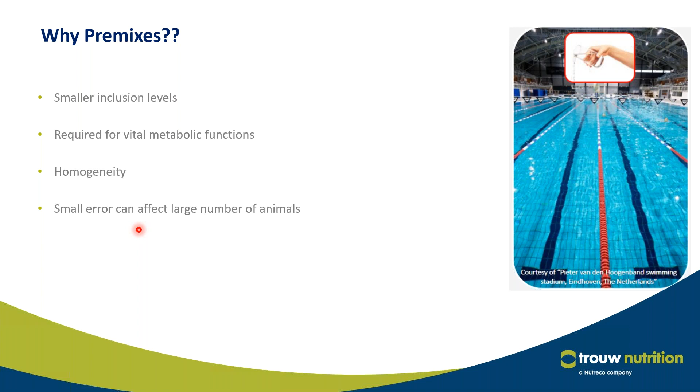Okay, so there are various steps involved while we are producing our premix at our factory. The major ones being understanding or knowledge, quality standard - this is our internal one known as nutrace that I'll be explaining in the further slide - and then formulation and mixing.

So what do we mean by understanding or knowledge? It's having a basic understanding with respect to the nutritional requirement of the micro ingredients of various species, like broiler, layer, breeder, dairy, aqua, etc. So their requirements are different, and we basically need to know what their requirements are. And then according to the nutrients they require, we should have knowledge of the forms of the micro ingredients that need to be added, which type, how bioavailable they are, what are their interactions, how do they act with each other, their stability, etc.

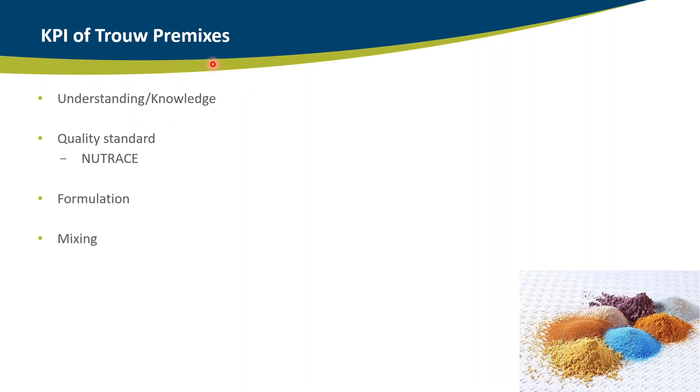Once we have a basic understanding, next comes the heart of the premix production, that is the quality standard. We have our own internal quality standard on top of the ISO, the GMP, FAMI-QS, etc. This is built in to ensure that consistency is maintained throughout the production process, right from the raw material to the finished premix. That's where nutrace helps us a lot.

And also, whilst we are doing this, we also need to keep in mind that it's the producer who is important and not the supplier. Why do we say this? Because we have strict quality control and quality assurance methods for us to ensure that we produce a quality product.

So the same pattern can be seen in other industries. For example, Apple company - everyone has an iPhone or Apple Watch or some other Apple product - and they have very strict global QC measures. That is the reason most of the spare parts of these products are procured from China, a bit from Taiwan, Japan, etc., assembled in China and then distributed to sales. So it's actually how strong your QC measures are that determines the quality of the product being produced, and the suppliers are not that important.

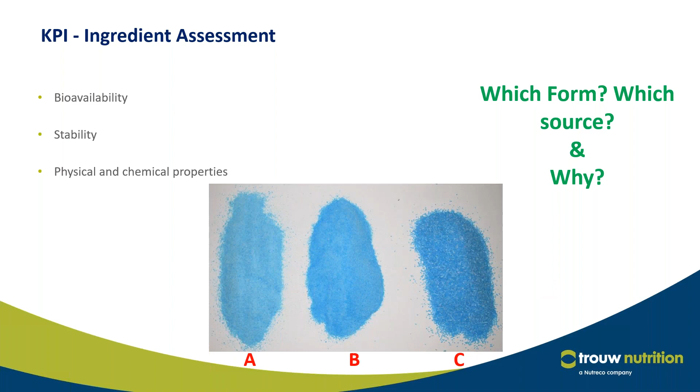Thank you all for your vote, and these are the results we have. For A, 7%, B, 29%, C, 29%, and 'can be any of these', 36%.

Over to you, Dr. Sabiha. Thanks, Chandni, and thanks everyone for taking up this poll. The answer is obviously option D, it can be any of these. Why? Because even though they have varying characteristics. For example, C is a bit wet and coarser in nature, making handling difficult. A is too fine, so it can stick together or flow a lot, which we call flushing. B has an optimum particle size, so it seems to be better. But any of these forms can be used if you know how to handle these different characteristics of the same raw material.

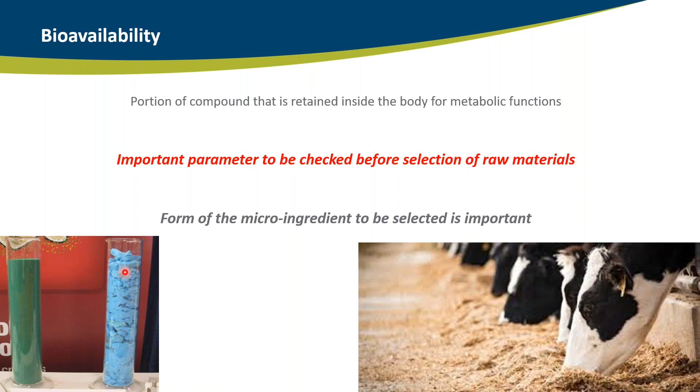Then comes the next parameter, stability. There are a lot of micro ingredients that have stability issues, the famous ones being vitamins, which are highly susceptible and sensitive to various external stressors. These can be in the form of moisture, light, pressure, heat, chemicals, pH, other supplements like trace minerals, and other oxidizing and reducing agents. So while we include vitamins, we need to ensure we add sufficient, suitable carriers and processing aids so as to produce a stable and quality premix.

Talking of stability, a stable raw material should be one that is not highly reactive, has good powder properties, and has less hygroscopicity. When such raw materials are included in a premix, the end premix will tend to be a stable one. So we wanted to check the stability of a premix, and we took two premixes, subjected them to a temperature of 40 degrees Celsius at a relative humidity of 85% over a period of 24 hours. Out of the two premixes, one tended to remain the same even after 24 hours, meaning it had quality raw materials going into it and sufficient amount of carriers, etc.

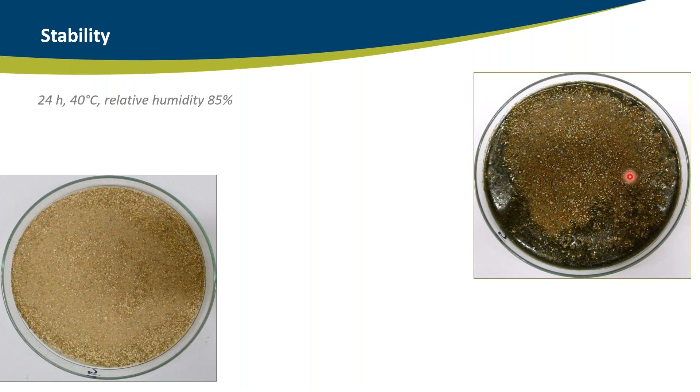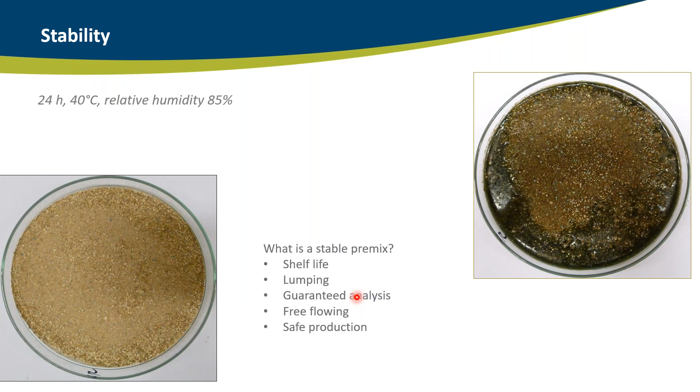The other one went into discoloration and was hygroscopic. This might be because it had raw materials that were hygroscopic enough and were not handled in a proper way so as to produce a stable premix. So stability is very important—a stable premix should have guaranteed analysis throughout its shelf life, should be free flowing without any lumps, and should be produced in a very safe manner.

Next comes the physical and chemical properties of the premix. Each and every ingredient has particular physical properties, like particle size, shape, density, flowability, etc. These are equally important as the chemical characteristics because they define how the premix looks, what type of premix we offer, and the handling of raw materials, their possible interactions, and mixability.

It starts with the visual approach. By looking at the raw material, we should be able to take a primitive decision with respect to the acceptance or rejection of the raw material.

So this is not the form recommended to be used in the animal nutrition industry. With color itself, you can reject this source of ferrous.

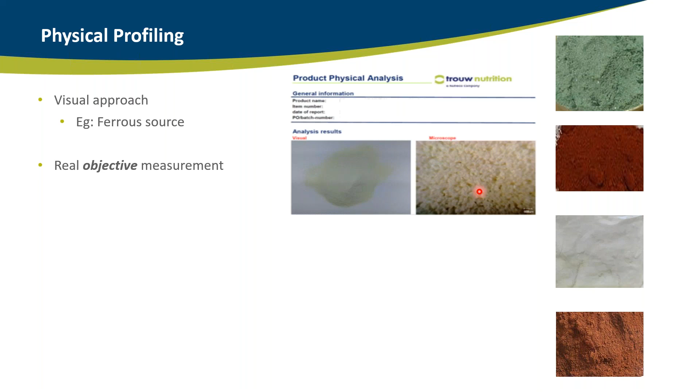By looking at the raw materials, you should be able to take a decision with respect to its inclusion or not. The measurements that we make are very objective. For example, you see here a raw material, this is how it looks to the naked eye, but we also look at it under the microscope, which gives an indication of how the particles are and how they are distributed.

That is where physical profiling comes into play, and various parameters are measured. The first one is particle size distribution. Particles tend to be either fine or coarse, depending on how they are produced. Fine is good for mixability, but it can reduce flowability. It has high electrostatic charges and tends to be very dusty.

The coarse, on the other hand, is bigger in particle size, but is very good in flowability, reduces dust, and is less reactive. So we really take a decision with respect to whether we are going to use the coarse form or the fine form for the raw materials included in the premix.

And then, of course, the famous density - both bulk and tap density - are very important to measure, to understand the packaging details as well as flowability and mixability of the premix, because it forms the base to give an indication of how compressible or cohesive a premix is.

That's very important, because the premix is produced at a facility and then goes to the customer's place. They should have premixes which are not too cohesive, so that it easily flows in their systems when automated or manual handling is used. They should not be cohesive enough to stick to the scoops when being used in feed production.

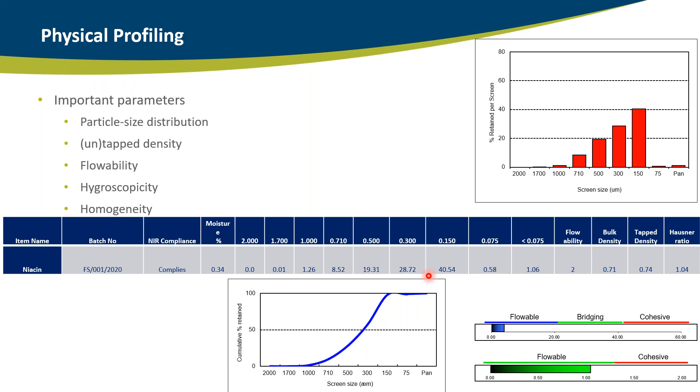For example, if you see here, this is how we carry out the physical profiling of the raw material. This is niacin, so it has a very good flowability of 2. It has good bulk and tap density, so it's not a compressible or cohesive raw material. Most of the raw material falls in the particle size of 150 to 300 microns. This gives us an idea with respect to the type of carrier to be included in the premix, and the type of coarse or fine raw materials to be included.

So the flowability meter, we measure it through flowability cups of varying diameter, the one at the top with the highest diameter and the one at the end with the lowest diameter. We measure a specific amount of raw material and allow it to flow through the cups. So 1 and 2 are the best ones in terms of flowability and thereby the handling, and anything 5 and 6 are not desirable, and we reject those raw materials.

So that was with respect to the physical characteristics. Then comes the most important one, the chemical characteristics. They play a role with respect to achieving the nutrient claims as per the requirement of the customer.

So we use NIR technology here, and we use it to map to a large extent all the incoming raw materials, and to some extent for end products we use the fingerprinting technology, and we also assess the activity and potency through that. The undesirable contaminants, such as heavy metals and dioxins, are also measured majorly for the minerals and the carriers. And of course, the pH is estimated for the vitamins because they're highly sensitive to pH. We also measure the pH of the carriers so that we use the right carrier for those vitamin mixes. And of course, the coefficient of variation studies.

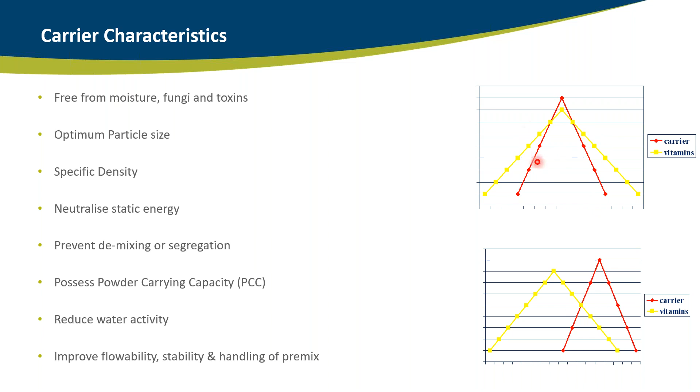So you can see here the two types of carriers. The first one complies with the characteristics of the vitamins, the other one doesn't, so the one on top is the most desirable carrier to be used. Within carriers we have different types: the inorganic carrier, also known as a diluent, and the organic carrier, simply known as a carrier itself.

The inorganic carrier is generally cheap comparatively. It has a very good density, and both low as well as high powder carrying capacity depending upon the particle size that we use. The disadvantage is that it has a very high pH.

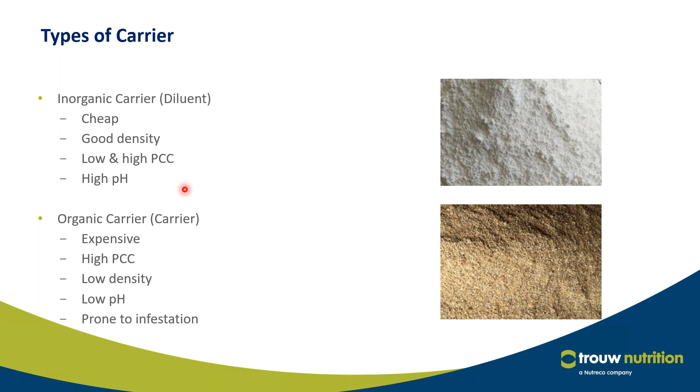But coming to the organic carrier, it is comparatively expensive. It has high powder carrying capacity, so it allows raw materials to flow very easily when included. The disadvantage is it has low density, and anything with low density can cause segregation or demixing. It has low pH, which is an advantage, but also the limitation that it can be prone to infestation if not handled properly. So it's always advisable to use a mix of inorganic and organic carrier in specific ratios.

And then come the processing aids. These are used to improve the stability and flowability of the premix. Vitamins are a mix of fat and water soluble vitamins, with the fat soluble being easily susceptible to oxidation, which is why antioxidants need to be added to prevent their oxidation. And then, of course, the free flowing agents are added to improve the flow characteristics of the fine particles.

So for example, we talked about this earlier as well: when particles are too fine, they tend to stick to each other and reduce the flowability of the particle. But when those particles are coated with free flowing agents, or particles with high powder carrying capacity, they are separated and kept apart from each other, and this leads to improved flowability.

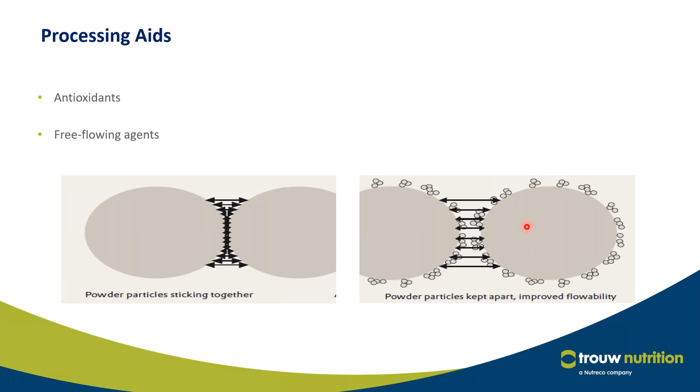Then comes the most important one, the formulation. We have a whole idea of understanding, and then we procure the raw materials according to our knowledge, and then comes the formulation. The formulator works to put in raw materials so that the nutritional claim is met.

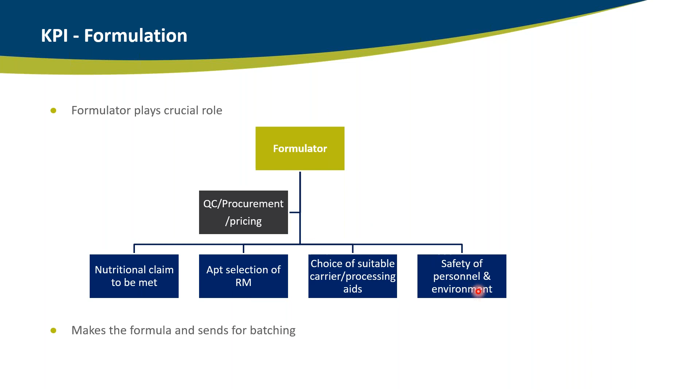He aptly selects the raw materials. He also chooses the carrier and processing aids according to the powder properties of the raw material, keeping in mind the safety of the personnel and the environment. So he makes the formula and sends it for batching.

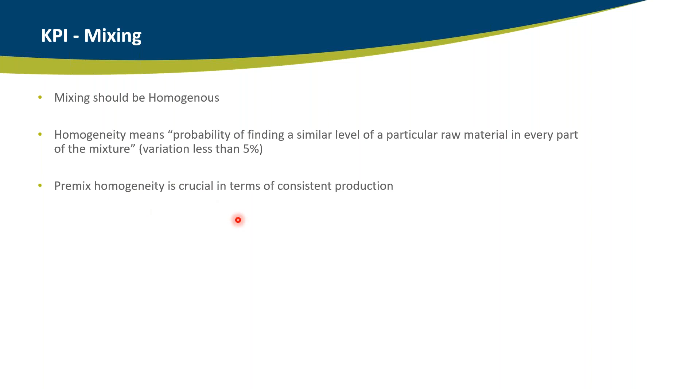Next comes the mixing. The produced mix should be homogeneous, meaning the same ratio of the added ingredient should be present in every part of the premix, with variation less than 5%. The one we produce here has a variation less than 3%, which Sandeep will be talking about. Premix homogeneity is very crucial for consistent production.

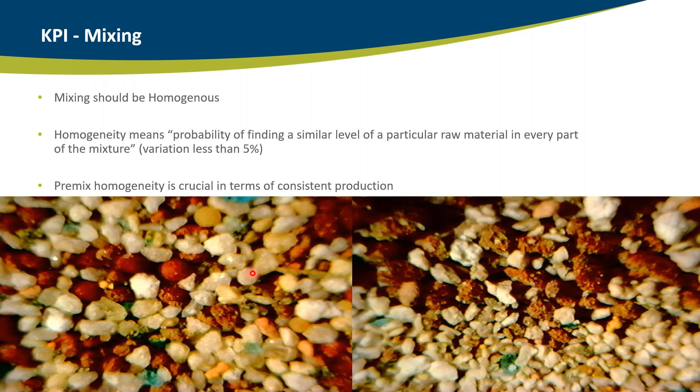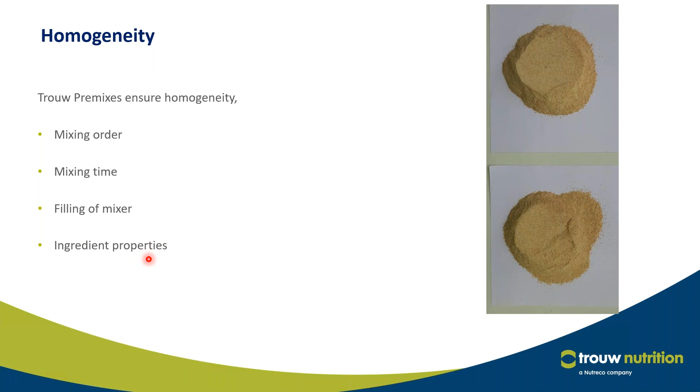This is just an example of how two different premixes can look. Obviously this is not a homogeneous one, while this one is more homogeneous, having equal amounts of white and brown particles. At Trouw, we ensure homogeneity because we have knowledge of the mixing order, which goes first, which next, and the mixing time established through coefficient of variation studies. The filling of the mixer should be neither underfilled nor overfilled, which can lead to non-uniformity issues, and we have a large amount of knowledge on the properties of the ingredients.

That was for the raw materials and how the premix is produced. After the premix is produced, it undergoes a QC check. For the finished premix, we follow the same 5 pillars to ensure quality premix is produced. We also carry out physical profiling for all batches. Chemical profiling is done once a year at random for specific premixes, or as per the need from the industry.

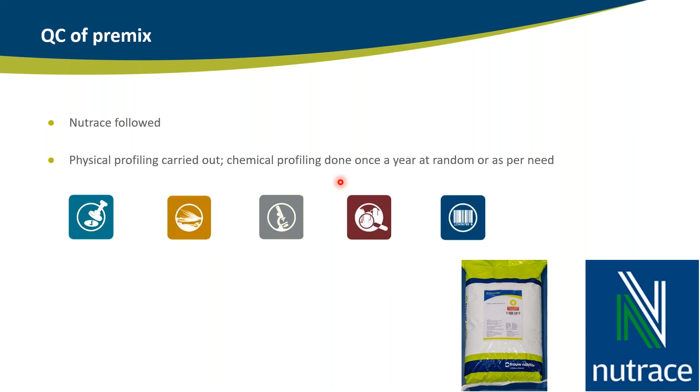Just have a look at these premix pictures. There will be a poll following this, asking which one is best to be used.

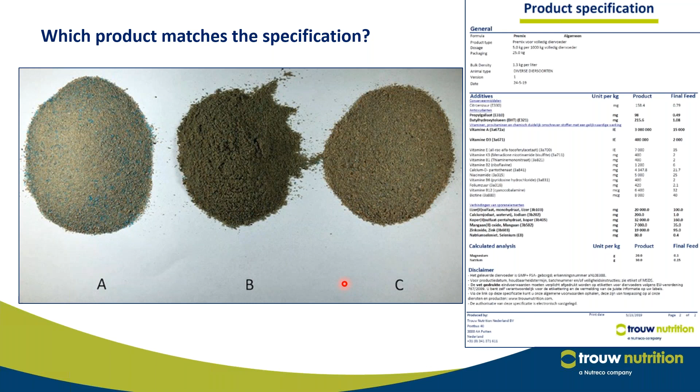So what do we offer in Trouw as a part of the premixes? We offer vitamin premixes as a standalone, mineral premixes as a standalone, and we also offer a composite premix known as MaxCare, which has a combination of the feed supplements and the required feed additives.

So why do we want to have a composite premix? Talking of the challenges, many of us are aware of this. It's in terms of quality and quantity basically. Quality in terms of the quality of the micro ingredients that are being procured, how they are stored. A bit of a headache is actually the inventory management. And then the quantity of the micro ingredients that are procured, because generally they're procured in smaller quantities, so pricing management becomes a very big challenge.

These are actually very known challenges to the customer. To some extent, these challenges are known or unknown, we can say. The major raw materials like maize, soya, MBM, etc. are procured. Few have labs to analyze, few are dependent on external labs, and few do not have labs at all. So we really don't know if precision nutrition is being followed with respect to the nutrients that are being delivered to the bird, and if they are formulated in the right way.

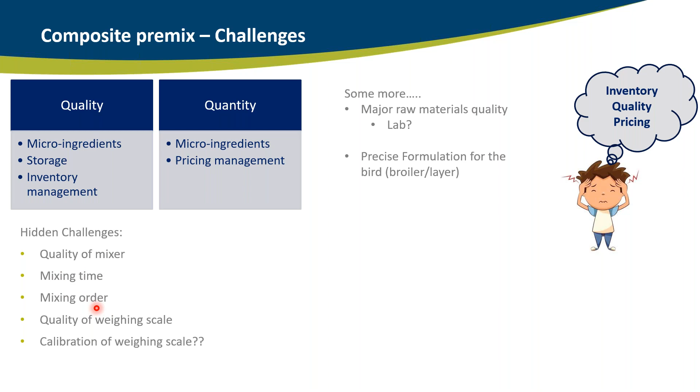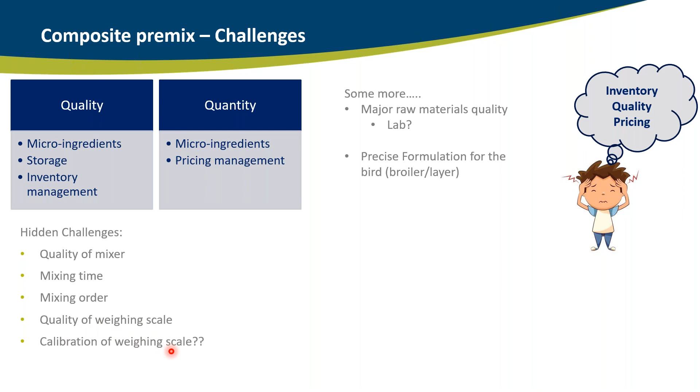So to some extent this becomes a small question mark. And then there are a lot of hidden challenges with respect to the type of mixer being used to produce this composite premix, or very popularly known as base mix in the industry, and the mixing time being used, what is the mixing order that is being followed, and while we are weighing these raw materials, the micro ingredients, how are they weighed, what is the quality of the weighing scale, and whether this weighing scale is calibrated on a regular basis. Do we measure the CV of the mix that is being produced? If no, then non-homogeneity is highly possible, and this non-homogeneity of the base mix or composite premix will lead to non-uniformity of the flock and inconsistent performance.

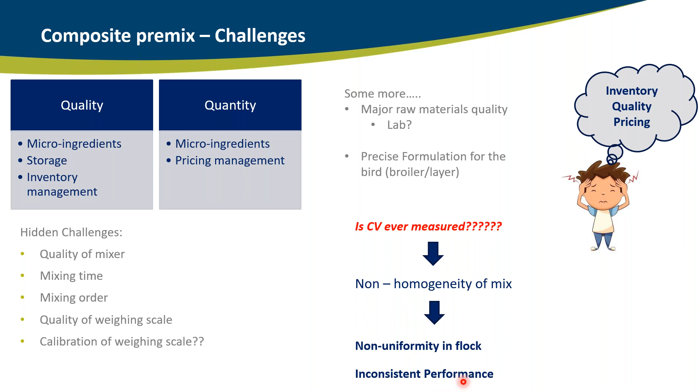So to address this, we saw there's a lot of headache involved there. MaxCare is a one-stop solution that will allow you to relax like you are near a very cool beach. So MaxCare has a balanced mix of vitamins, minerals, amino acids, and required feed additives. We have standard formula, and we also customize it depending upon the requirements of the customer.

The homogeneity of the micro ingredients is highly ensured here because we have expertise in micro ingredient handling, and they are always clubbed with precision nutrition offerings, so that the MaxCare formulation as well as the final feed formula being used meets the nutritional requirements of the animals. And it is optimized in feed cost. I would not say lesser feed cost or higher feed cost, it's optimized so that it gives a better performance and consistent animal performance. And the one to stress upon here is it's an antibiotic-free product, so we do not use antibiotics in our facility. Neither AGPs nor anticoccidials are used in our MaxCare.

So the benefits are in terms of convenience, that's the first and foremost one, because the customer need not maintain inventory of too many micro ingredients, and it's very easy dosing for him, no human errors come in. Just have to put 1 or 2 bags per ton of the mixer, and then it's a simple purchase, need to be in contact with just one supplier. Simple logistics, too many vehicles will not be coming into the feed mill or the farm, so only very few vehicles coming in. Assured quality because of our micro ingredient expertise, and of course assured performance in terms of better body weight, FCR, better uniformity, and better production characteristics in terms of the reproductive animals.

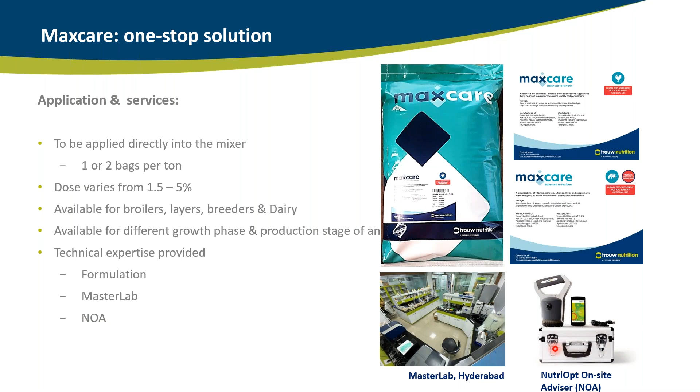So the key takeaways: premixing is an art, with a lot of science going into it. Its production should be carried out only by one who has expertise in it. It should be produced very carefully with great precision, because even small errors can cause huge losses in animal performance. The homogeneity and the flowability of the premix are crucial. The premix produced should be safe, reliable, stable, sustainable, as well as traceable. So the expertise actually lies in how we buy the best quality raw materials and the way we formulate it so that the best products will be produced according to the customer requirements.

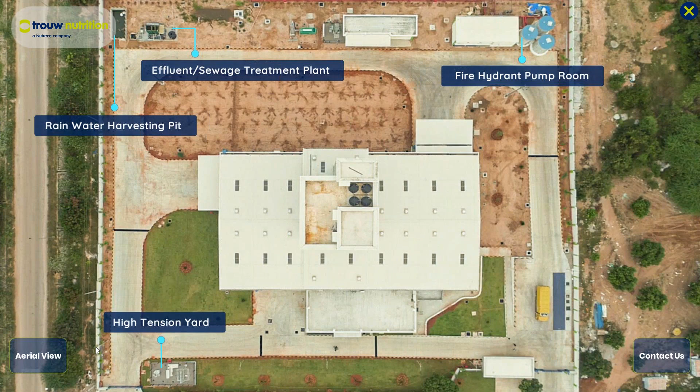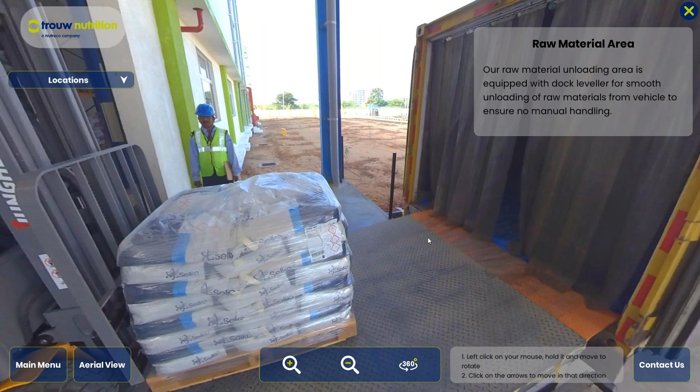We will take you forward to our raw material receipt area. Here we have the raw material unloading bay, wherein approved vehicles are docked with assistance from our security. We are equipped with a dock leveler, wherein the forklift enters the vehicle and unloads the lots we receive. This is arranged in an order so that there is minimal handling by man, which helps us maintain the integrity of the product as well as reduce man handling.

Once the raw material has been received, it is kept in the quarantine area and a sample is withdrawn, wherein it is subjected to quality control tests as per the monitoring program. Each individual raw material lot received is labeled with a barcode to comply with our requirement of tracking and tracing. So all the ingredients we receive in the factory are labeled with a unique barcode, which the system identifies during complete processing.

We'll move ahead to our warehouse. Here we have the complete picture of our storage areas, which are divided into two locations. One is the ambient temperature area, which does not have any subjective cooling facilities but is equipped with an active ventilation system, helping us keep the temperature at least 5 degrees below atmospheric temperature. For example, if the temperature at Jadcherla is 35 degrees Celsius, we will have around 30 degrees in the warehouse.

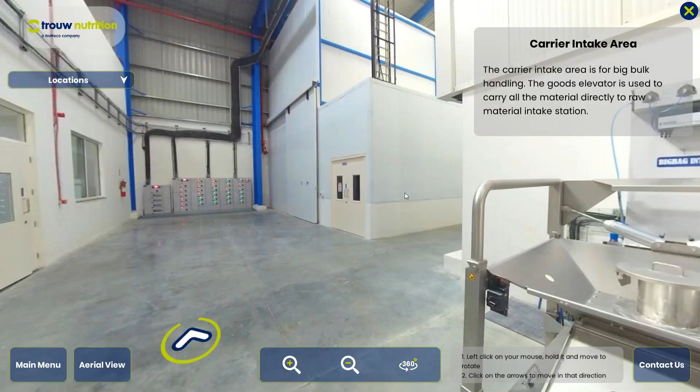Okay, now once we receive all the raw materials and they've been stored, these raw materials have been released by quality control after approving to the desired parameters. Once these raw materials have been approved, production requests the issuance and gets the ingredients for the daily production.

Here we can see our carrier intake station. It is a big bag handling station wherein we can handle bags up to 1 ton, and this system is equipped with a barcode system and an HMI, human machine interface, where you can see the description of the ingredient going inside. Once the operator scans the barcode, the system allows it to dump the ingredients into this intake station, where this ingredient is taken to our 8th floor, which is the storage area, where we'll be going now.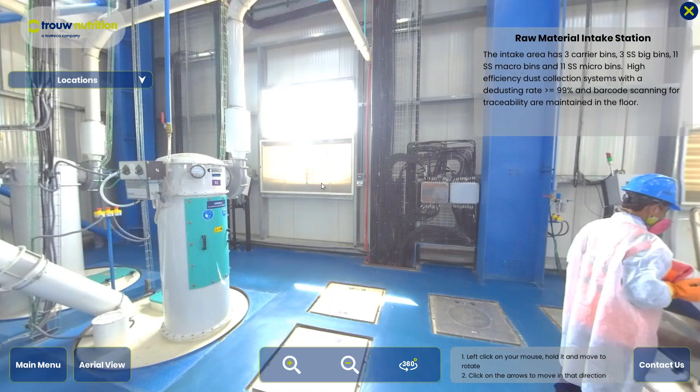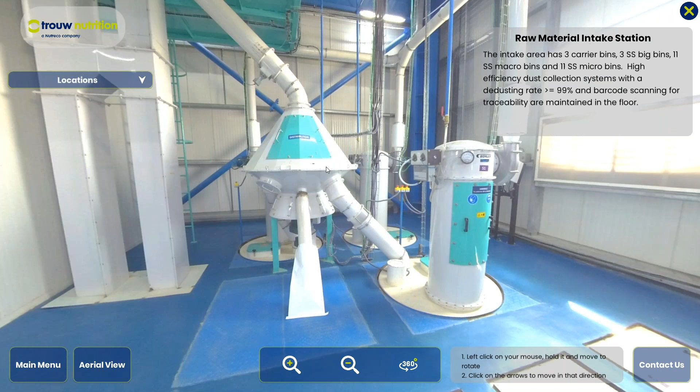So this storage area is part of the production area now. What we have here is the storage locations, which are our silos. This is the carrier storage area. What we have seen at the ground floor, the intake station brings the material here by means of conveying systems such as bucket elevator, and with the help of a distributor, it is automatically distributed to its dedicated storage areas or storage silos.

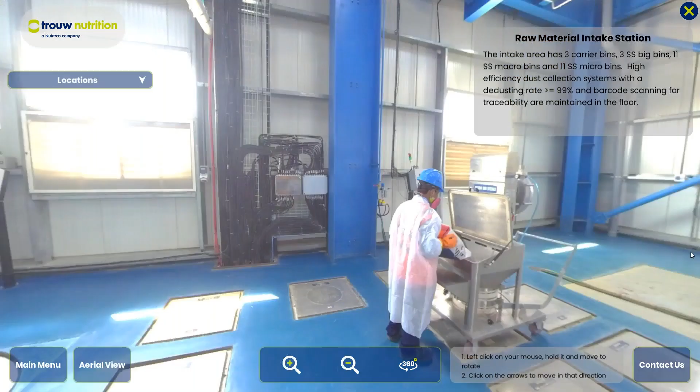What we have here is other ingredient intake stations such as vitamins and minerals. This has been constructed in a way that we handle the material only at the point of intake, and that is the minimal handling, the only handling done by a human at the intake stations. Once these bins are filled, the material is completely taken into the production process automatically. These systems are also equipped with HMI and barcode scanners, wherein the system operator scans the barcode and allows it to be taken into storage.

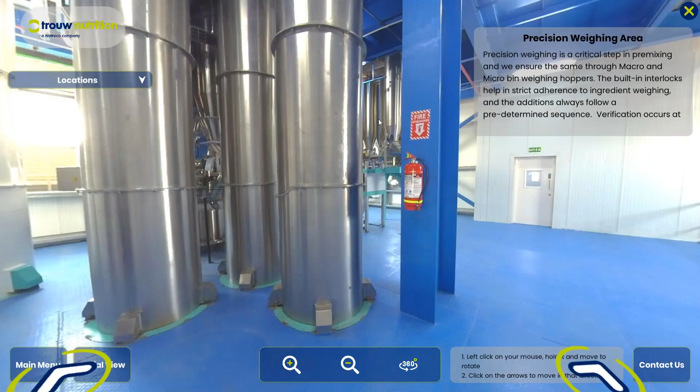What we can see next is our precision weighing area, wherein the active ingredients are precisely weighed and transferred through this conveyance system. The precision of our weighing system is up to 200 grams with a deviation of 0.2%, which allows us to basically negate any kind of deviation into the process.

As I'm talking, this process is completely automatic. There is no human intervention; it is only monitored by a person who is centrally controlling all this process.

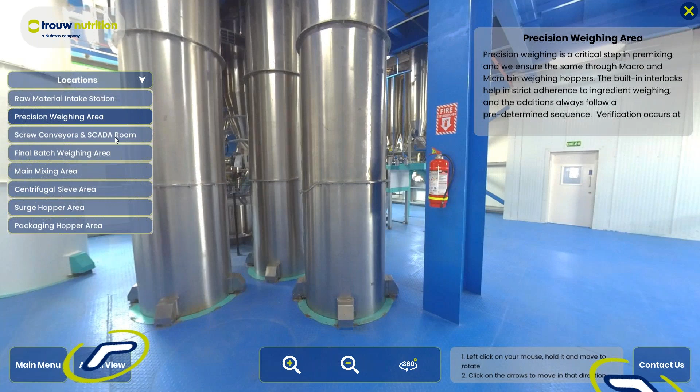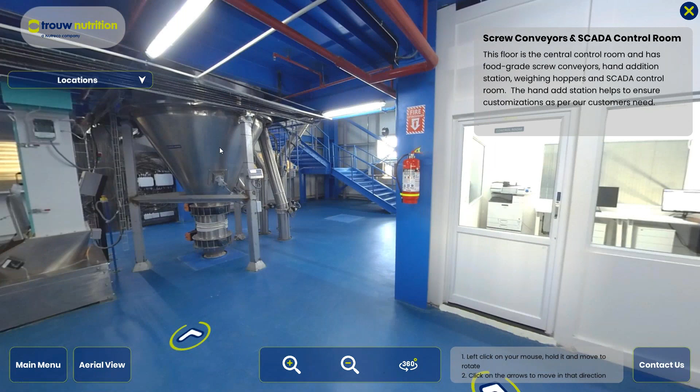We'll get to the next room. This floor caters to the control room as well as the carrier weighing area. The control room has been equipped with our SCADA software, wherein all the data acquisition and controls is being taken care of by the SCADA engineer. The engineer basically monitors all the activity from the intake, weighing, and conveying to the mixer, mixing, and then packaging. Each step is monitored by the system and allowed by the engineer to move forward when the batch complies to the specified weight and process. So all the process control is controlled at this particular station.

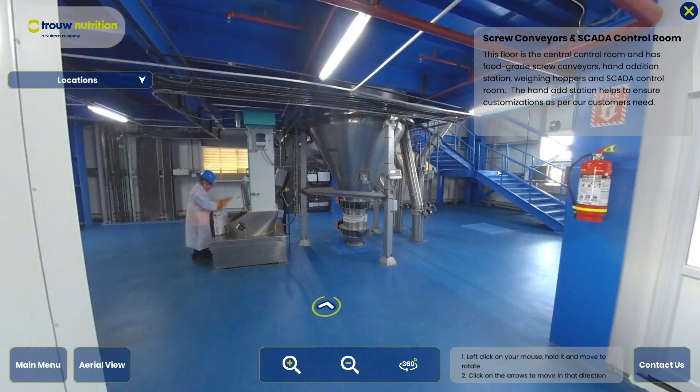We also have the hand add station wherein we can accommodate any customization to the premix as per the needs of the customer. This is again one of the stations equipped with a barcode scanning system, where any ingredient going into the system is taken into record.

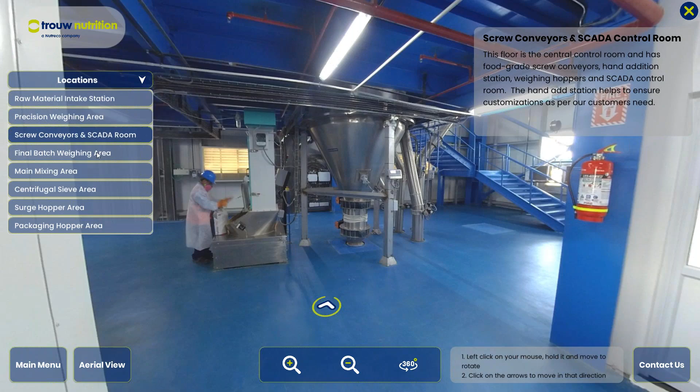We'll be going to the final weighing area. These are the big hoppers where the final weighing of the batches happens. After confirmation from the SCADA engineer that the batch matches the target quantity, the batch can be moved or conveyed to the mixer.

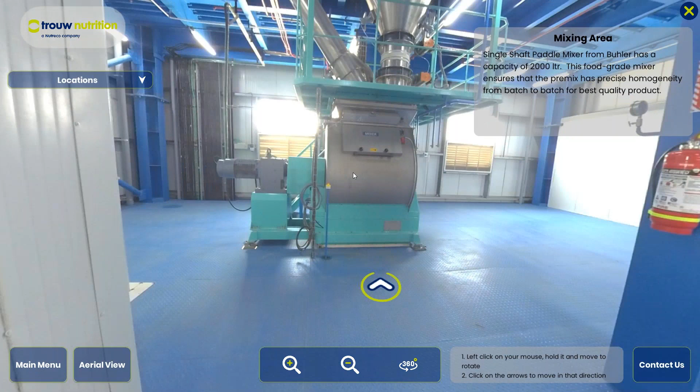So this is our mixer. Its make is Buhler. It's a single shaft paddle mixer with an RPM of 1470, and it has been validated for a CV of below 3%. This mixer has high speed mixing capabilities, which gives us precise homogeneity in our process.

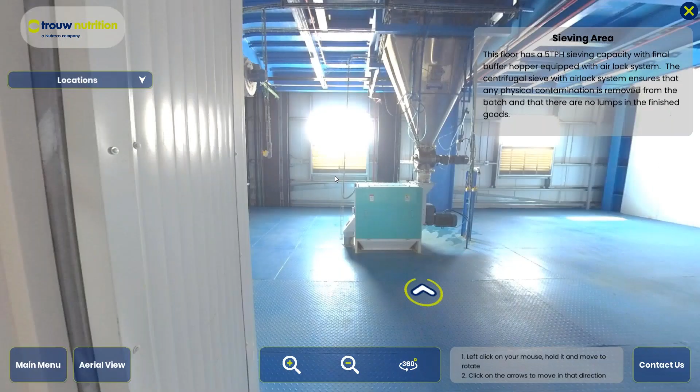What we can see next is our centrifugal sieve system. This system basically removes any kind of contamination or lumps formed into the premix, as these may cause further defects in the premix. So to negate any kind of lumps or contaminations in the premix, it is taken out from the system by this centrifugal sieve system.

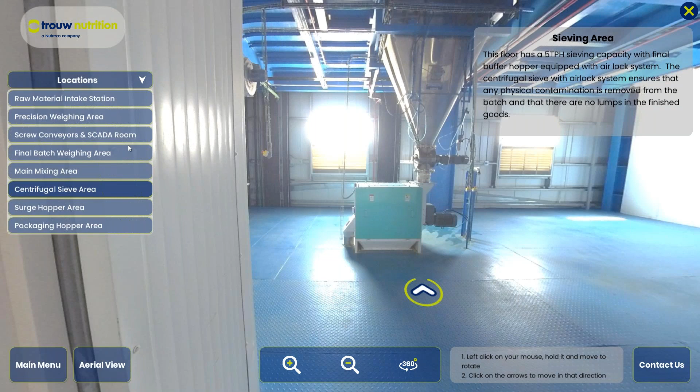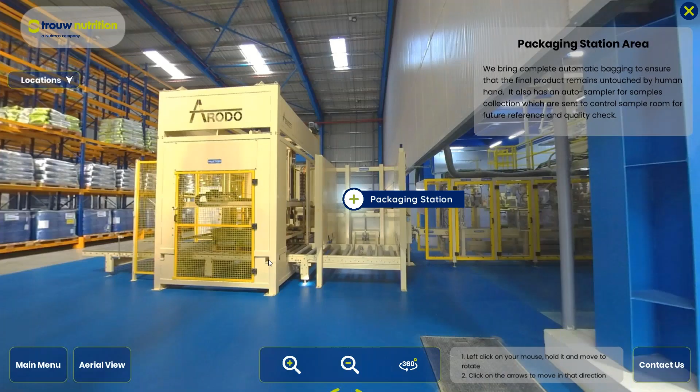Once the sieving is completed, what we can see here is the packing hopper area. This packing hopper area is connected to the surge hopper, which acts as the buffer for our packing machine. The bagging machine is also one of a kind in the industry. What we can see here is our bagging machine. Allow us to give you a brief video about how the packing operation happens at our nutrition facility.

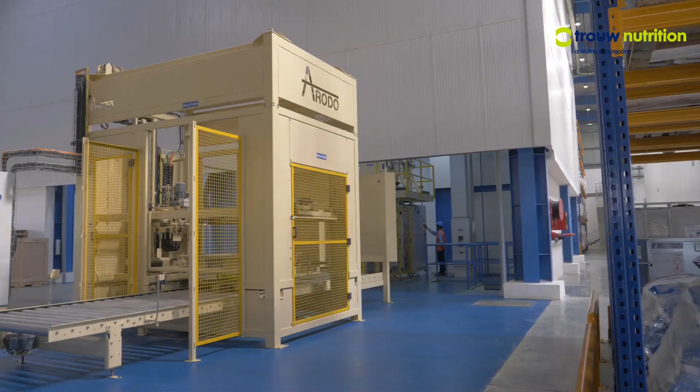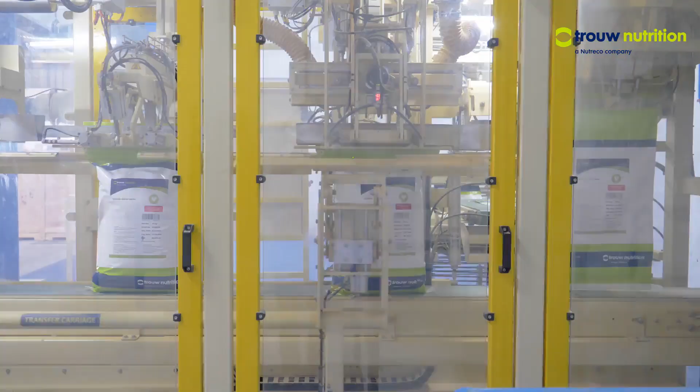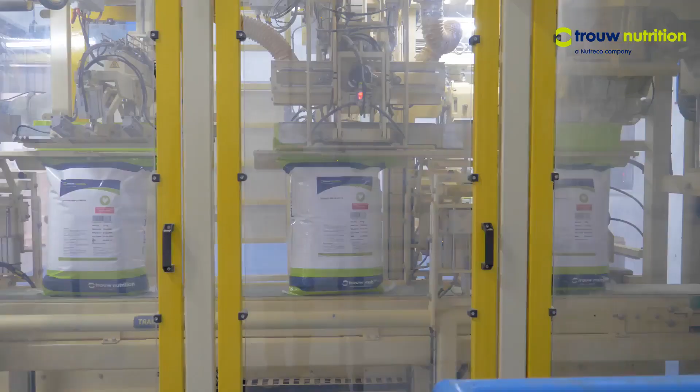Our commitment to quality assurance for our customers means that we bring the latest technologies and innovations. One such unique technology is the automatic bagging equipment. This equipment, with a capacity of 300 bags per hour, is fully guarded in line with our global safety standards. It has a high precision weighing system with an auto sampler. With no manual intervention, the finished goods remain completely untouched by hand.

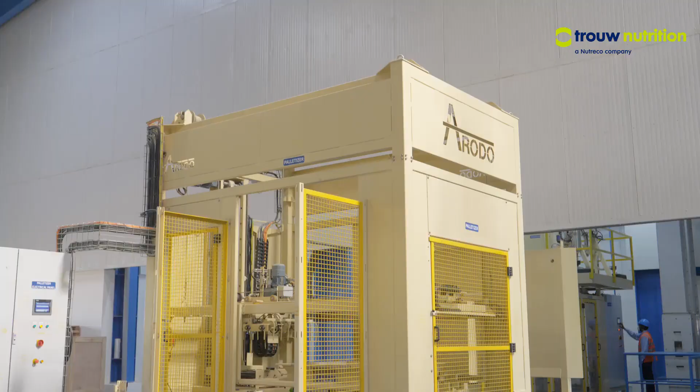As you have seen what our packaging machine is capable of, this equipment allows us to give out the speed. It also allows us to have the packing operation completely safe for our operators, giving minimal human intervention in the complete packaging process. This minimal human intervention, as we can see from our manufacturing process, is a peculiarity here.

Once the finished goods are packed, they are transferred to the quarantine area, where they stay until quality control gives approval, and later, once approved, they are dispatched to our customers.

What is peculiar about all this process is that this complete manufacturing process has end-to-end tracking, tracing, and controls, where we can determine that the process has been followed and completed with the set process control parameters, quality control parameters, and requirements of our safety standards. This is all from our factory side. Thank you.